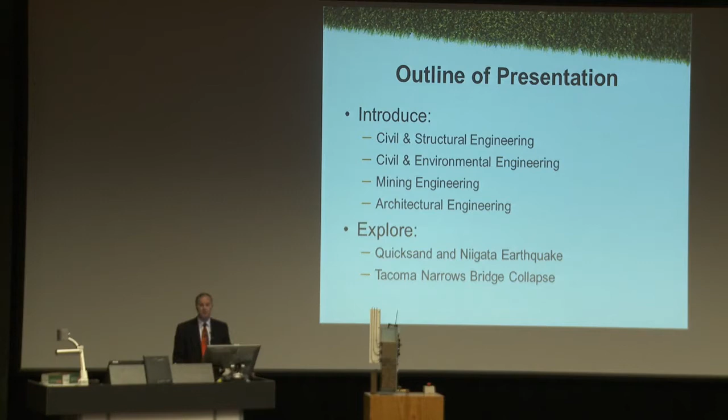And we're also going to explore 2 classic failures. We're going to look at quicksand and the Niigata earthquake, and we're also going to explore the Tacoma Narrows Bridge collapse and see what we can learn from those 2 classic failures. So let me start by talking about our programs that we offer in our school.

So as I've just mentioned, we offer the Bachelor of Engineering Architectural, Bachelor of Engineering Civil and Environmental, Civil and Structural and Mining. And those 4 degree programs are, like all standard engineering programs in Australia, a 4-year degree. There are also a mixture of double and combined degrees.

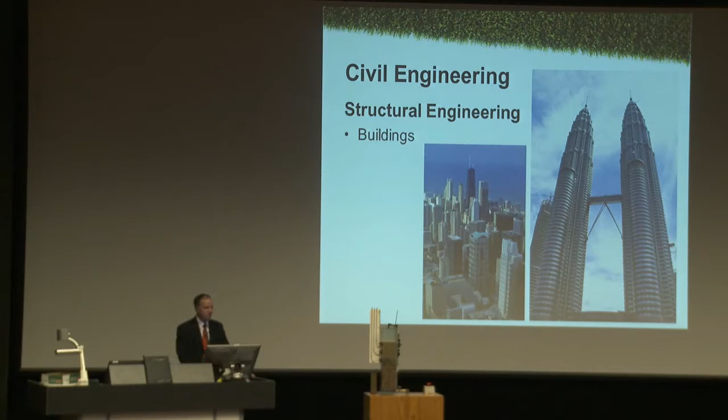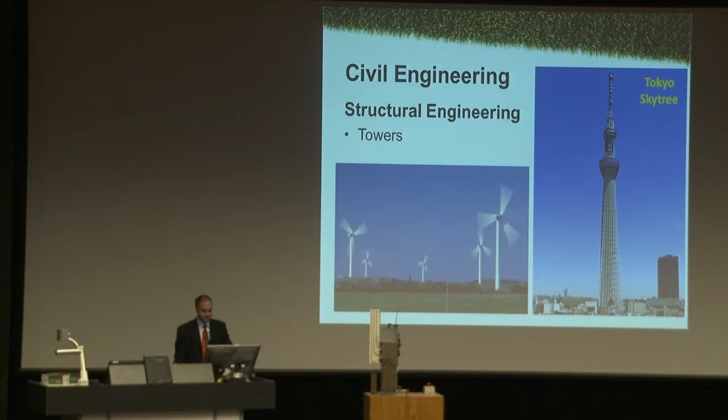So it's made up of 5 disciplines. The first of those is structural engineering, which most people would be aware of. And structural engineers get involved in the design and construction of buildings and of bridges, towers, dams, and the like. Beg your pardon. I've jumped to water engineering, which also crosses over between structures and water.

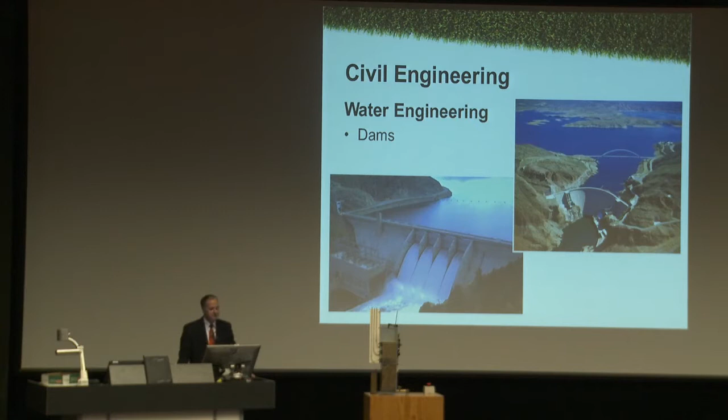So the second discipline is water engineering. So water engineering is also about dams. It's about water and wastewater treatment. So the water that we drink every day and take for granted comes often from the River Murray, and it goes through a filtration system at a number of locations around the Adelaide metropolitan area and gets purified,

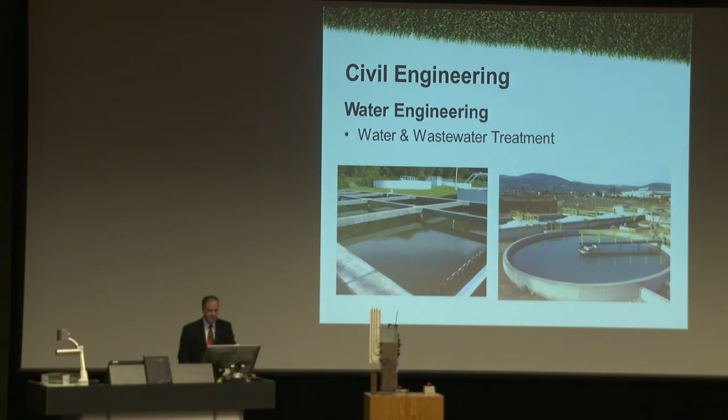and chlorine gets added and fluoride. And civil engineers are involved in those aspects, as well as wastewater, the stuff that we put down the sink and the drain and the shower and the toilet ends up at a wastewater facility, and the facilities associated with those, the equipment and the processes are also things that civil engineers get involved in.

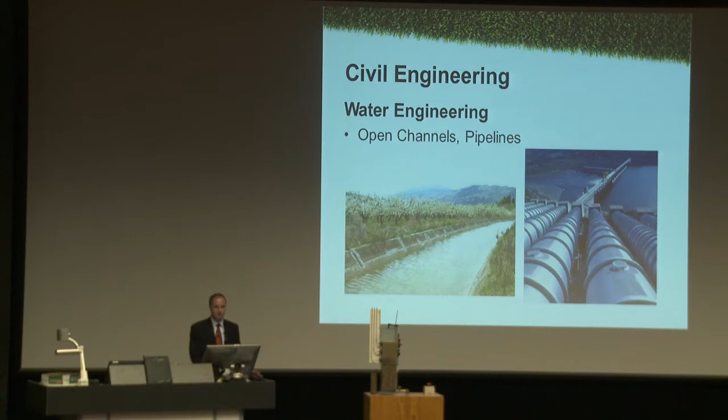We get involved also in open channel, such as you can see on the left-hand side of this screen, as well as pipelines and pumps and all of the infrastructure that is involved in those different aspects. I'm a geotechnical engineer, so I deal with the ground, soils and rocks, and we understand how soils and rocks behave when load is imposed upon them.

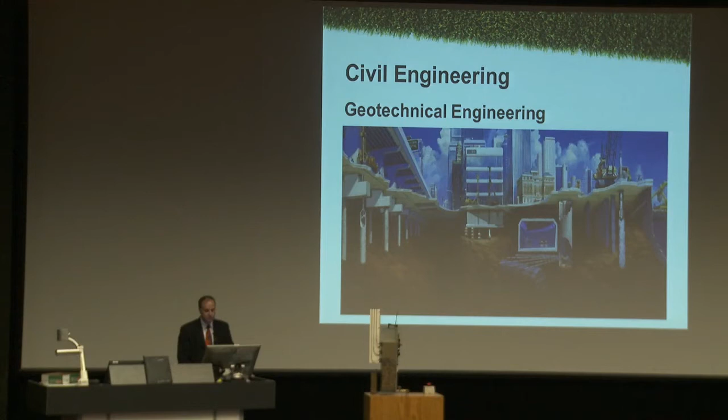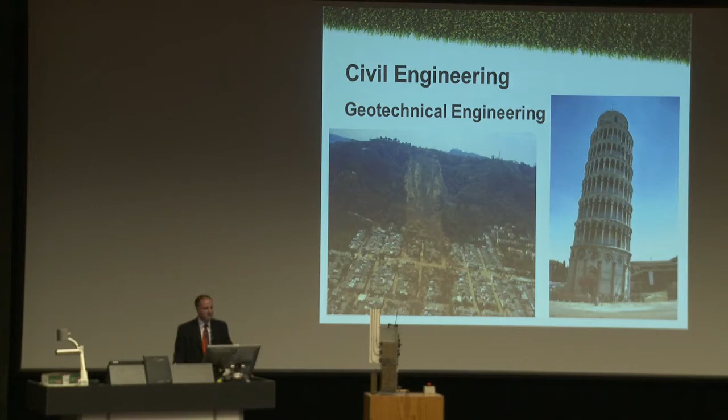We want to make sure that things don't settle too much, or that the ground is strong enough to withstand the load that we impose upon the ground. So the sorts of things that a geotechnical engineer gets involved in are pretty well summarised on this slide. So foundations, tunnels, retaining walls and things like that. It's also about landslides, and it's about settlement, and a classic example of differential settlement, that is the settlement from one part of the structure to the other, is associated with the Leaning Tower of Pisa.

And the last one is transportation engineering. It's about transport networks, such as the Northeastern Busway. It's about roadways and highways, and it's also at the micro level. It's about intersections and traffic flow. So all of those 5 different disciplines are what influences civil engineers.

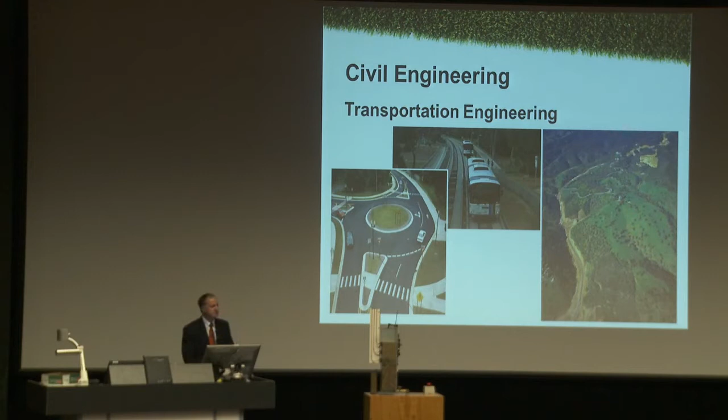Just before I go into the differences between the different programs, I'll just focus my attention on some of the other aspects of some of our other degrees. So architectural engineering, for example, focuses on building design, and it involves studies from architecture. It incorporates structural engineering, geotechnical engineering, building services, sustainable design, and water environmental, but to a very small extent compared to the civil and structural degrees.

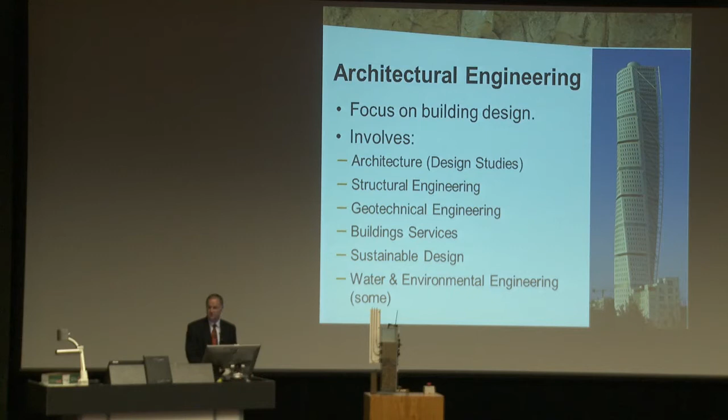So when we combine these together into a matrix, we'll look at these three degree programs which have some overlap. So you can see that in the first column here, civil and structural students would get involved in structural engineering, water engineering, geotechnical, but to a lesser extent in environmental engineering and transportation engineering.

Civil and environmentals, for example, would focus their attention more on water and environmental engineering and to a lesser extent to structural engineering. Architectural engineers, on the other hand, focus their attention on structural engineering, geotechnical, and to a lesser extent, water and environmental.

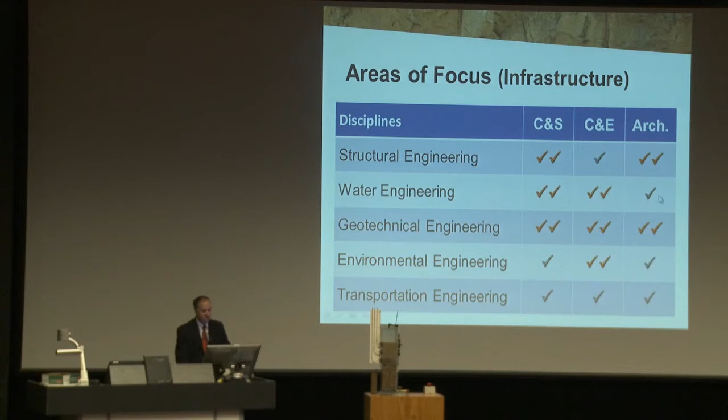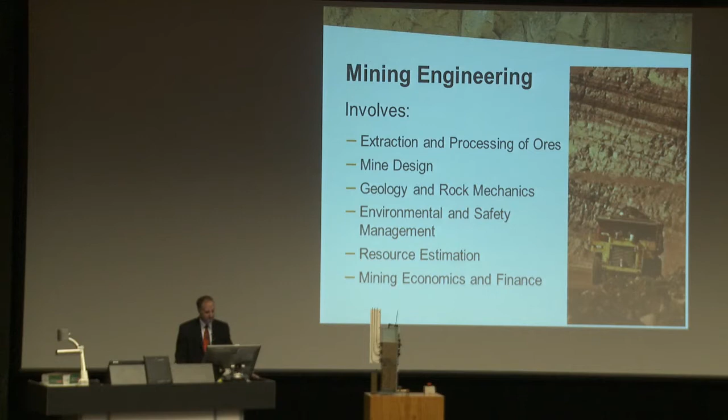Mining engineering, as I'm sure you're aware, involves extraction and processing of ore. It's about the design of mines. It's understanding the geology of the earth and about the strength and characteristics of rock. It's about ensuring that these operations are performed in an environmentally sensitive and safe manner. It's about estimating the resources that are in the ground and therefore involves mining economics and finance.

We get together every 6 months to compare notes, to compare the quality of our courses, and to ensure that our teaching is at the highest standard. It's actually not only a national, but it's also an international leader in mining engineering education.

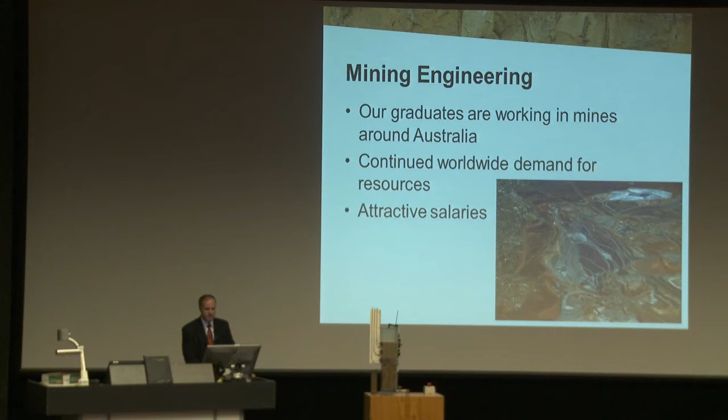Our graduates are working in mines all over the country, and you might think that resources is going through a downturn at the moment, and that has been as a result of the high Australian dollar and reduced demand worldwide. But the demand for resources will continue to increase into the future as more and more of the things that we need and build require resources from the earth. And our mining engineering students attract the highest salaries in our school.

So that's the background of the various engineering degree programs that we offer in my school. If you have more specific questions, I encourage you to talk to me or to my colleagues after this presentation.

So for the rest of today, I'm going to talk about how we learn from failure. It's an innately human characteristic. To walk, as children or babies, we would stand up and we would fall down, and we'd learn from that experience. We'd learn that falling down is painful, and we'd eventually learn how to walk. It's an essential characteristic of engineering too, that it's unfortunate that things fail, but we learn from those failures. And it's essential that we do turn those failures into a learning opportunity.

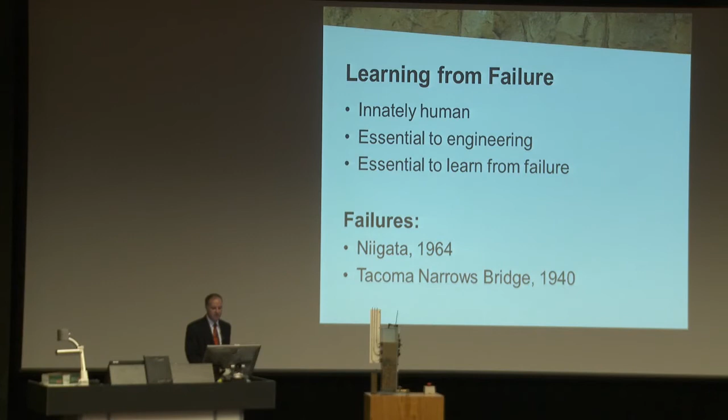As mentioned, I'm going to talk about 2 failures: the Niigata earthquake that occurred in 1964 and the Tacoma Narrows Bridge in 1940. So you might wonder what's the Niigata earthquake about. It's a classic quicksand or liquefaction failure.

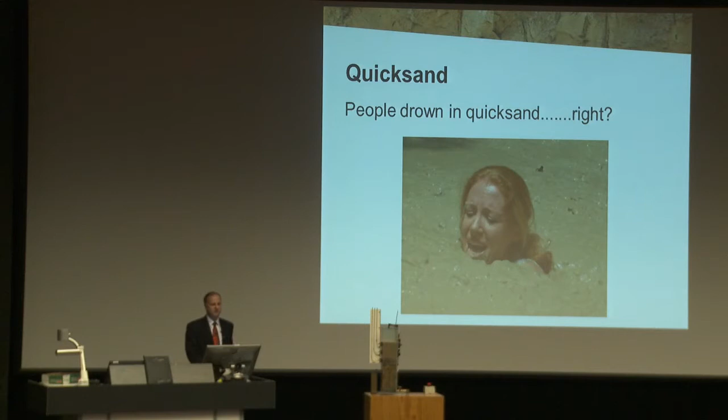If you're as old as me and you've seen some movies where people drown in quicksand, then we've become accustomed to believing that people drown in quicksand, often shown by Tarzan movies. This is an old one, so most of us weren't born when these were around.

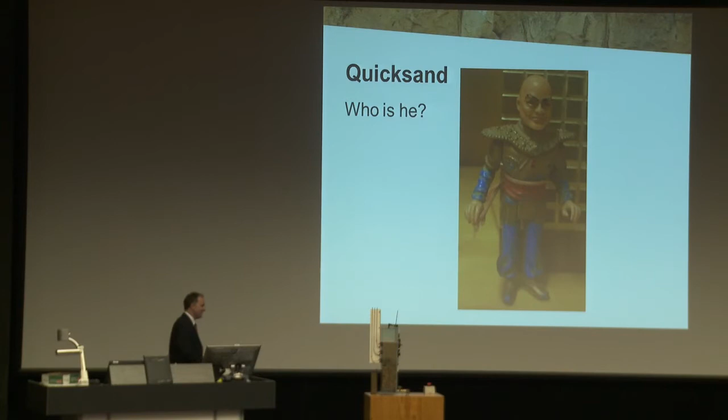Does anybody know who this gentleman is? The Hood. Good man. From? Thunderbirds, that's it. So the Hood from the Thunderbirds. The reason I mention the Hood is because I have a scale model of the Hood, and I'm going to put him into quicksand.

And I won't ask you to put your hands up, but I'll ask you to think about whether this model would sink or float in quicksand. And you might say to yourself, well, of course he's going to float because he's made of plastic.

Well, this slide shows some statistics from a couple of doctors that performed some research in 1978 on 308 men. And this shows the specific gravity of a human person. So I've weighed this individual and I've measured his volume, and his specific gravity is about 1. And that's our specific gravity essentially.

Well, not weigh, but as I said, our specific gravity is equal to 1, which means that our density is similar to the density of water. And here you can see that our specific gravity or body density is about 1. Don't worry about the x-axis because that's exploring how we might measure the density of a human being based on the skin folds. However, this model has a specific gravity of 1, and I'm going to lower him into quicksand now.

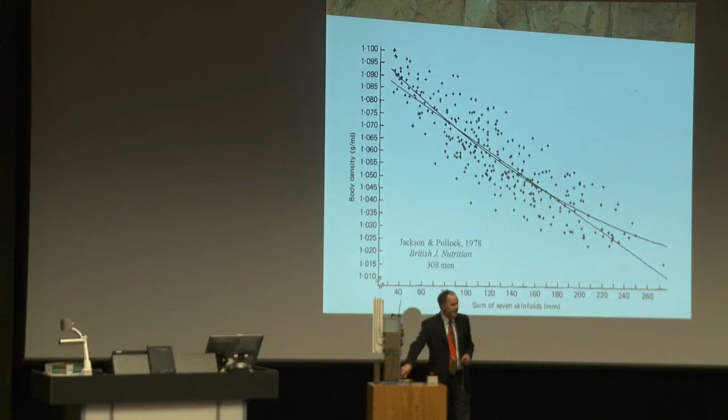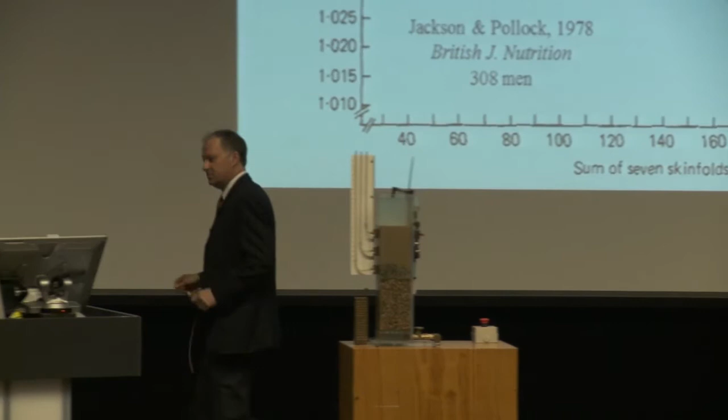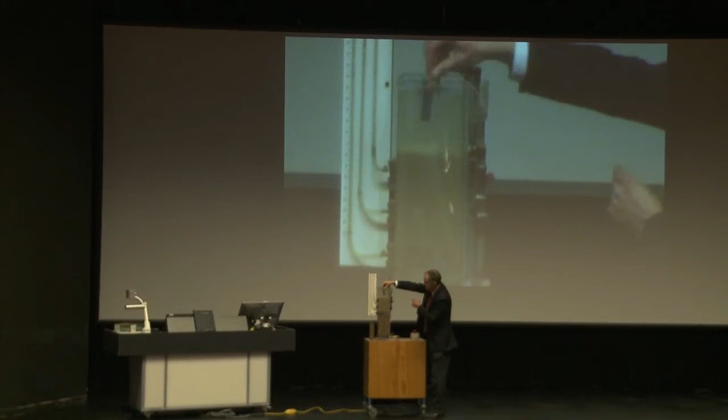So quicksand occurs in nature when we have water flowing vertically upwards through a column of sand. So what I have under here is a pump and a reservoir of water, and what I might do is just go to the camera, for those that can't see at the back. So this is what we call boiling sand, or liquefaction is its correct name. So I'm just going to lower him in and we'll see what happens. So you can see as much as I try, he's not actually sinking in quicksand.

Let me show you another example that came from the Mythbusters episode a little while ago. And the myth that they were exploring was, do people sink in quicksand?

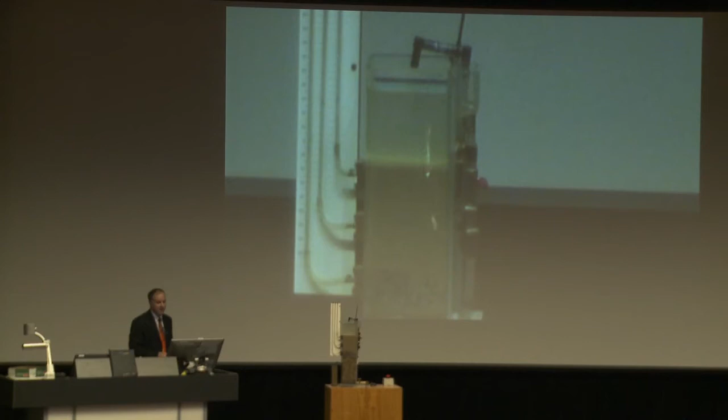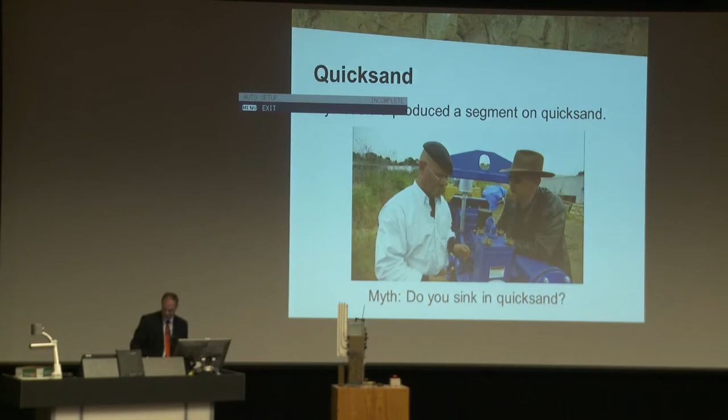Oh, I'm not sure what's happened to the sound in that one. Apologies for that. Camera off. Good. Oh, you can't see. Thank you. That's why it's not working. Thank you. I'll rewind it. Sorry about that. That's better.

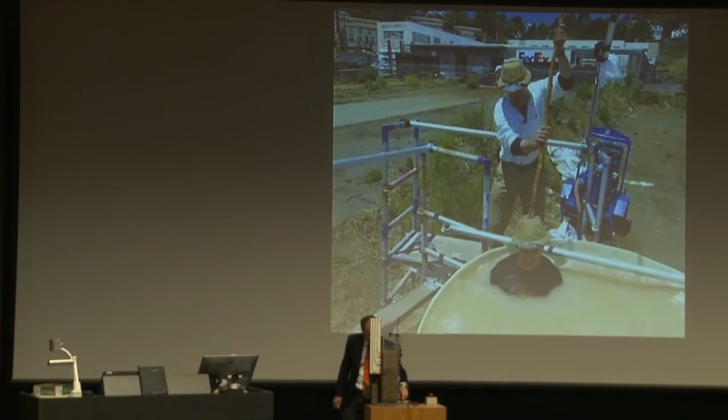It might occur at the beach when we've got water flowing from a hillside towards the sea. The sea is salty and therefore more dense, and fresh water is less dense and so can sit on top of the salty water, and we can get water percolating from the ground as a result of that.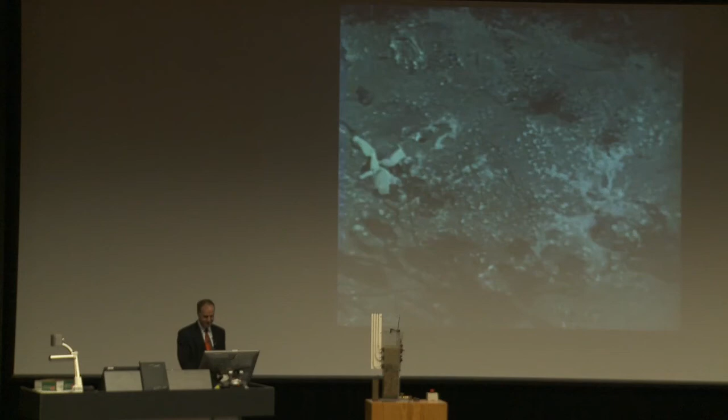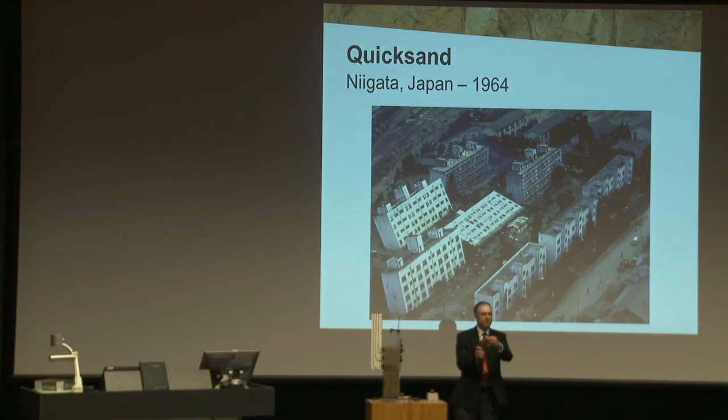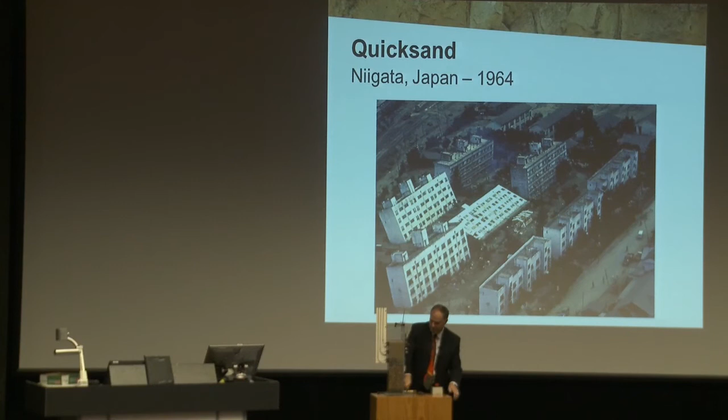So what I'm going to show you is a situation that occurred in Niigata in 1964. This is a model of a building complete with a flag on top that the guys made for me. It actually weighs 5 kilograms. It's solid bronze. It's quite heavy, and it's not going to sit down because there's still some. Let me just see. Need to drain the water down a little bit more. So I just need to put that down. So what I'm trying to do here is, you can't see again.

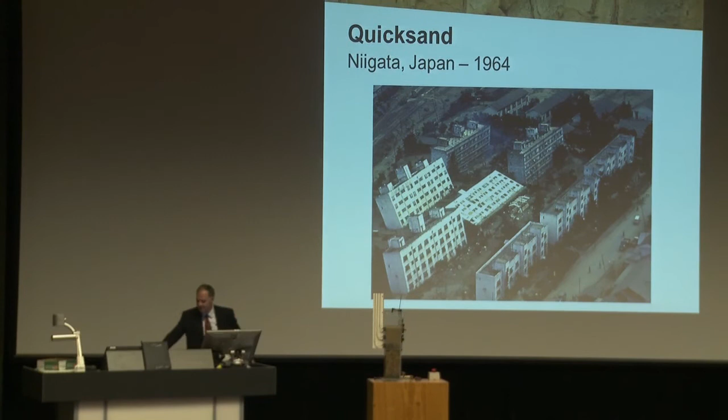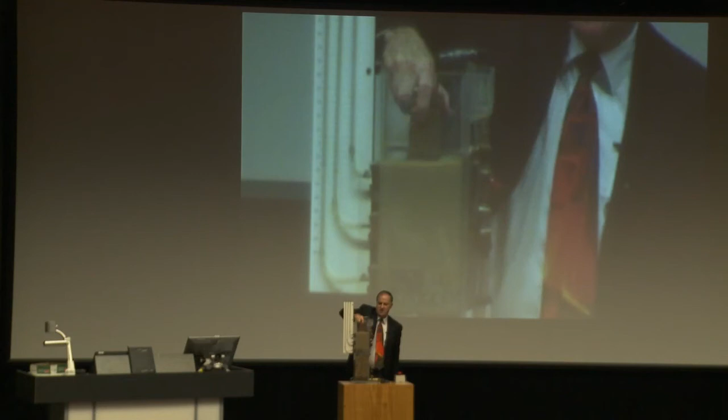What I'm trying to do here is simulate the same kinds of ground conditions that occurred in Niigata in 1964, where the water table was close to the ground surface. So when I place the building on the ground, you can see that it sits there happily, but along comes an earthquake, and watch what happens. So I wonder what happened there. What happened with the earth, with the building, why it fell down.

Normally in a class I would ask for questions, a bit more difficult here. What happens? An earthquake is a wave that propagates through the ground. Because the sand is essentially beneath the water, the motion causes the particles to vibrate relative to one another, and so the particles separate for an instant in time. So for a moment, this building felt like it was on water, and hence that's why it failed.

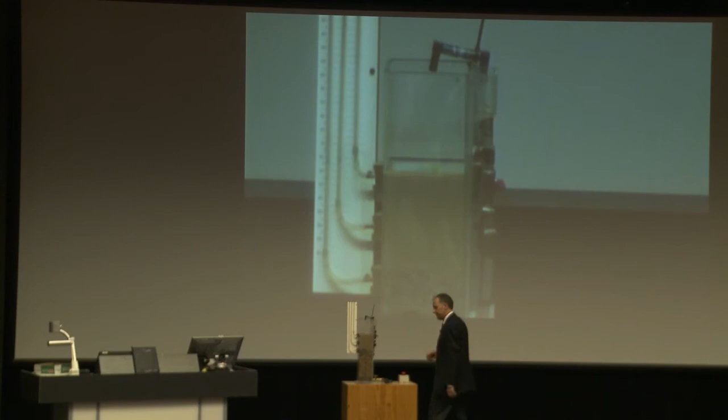I just remembered that I've forgotten to tell you why people float in quicksand rather than sink. And that is because the combined density of the sand and the water is actually more dense than water by itself. So it makes sense that we actually float in quicksand. The other thing to bear in mind is that the buoyancy is greater because I had a flow of water upwards through the ground, and that adds to the person's ability to float.

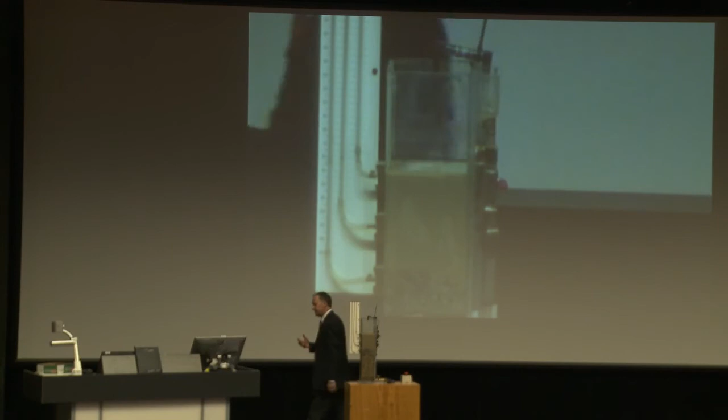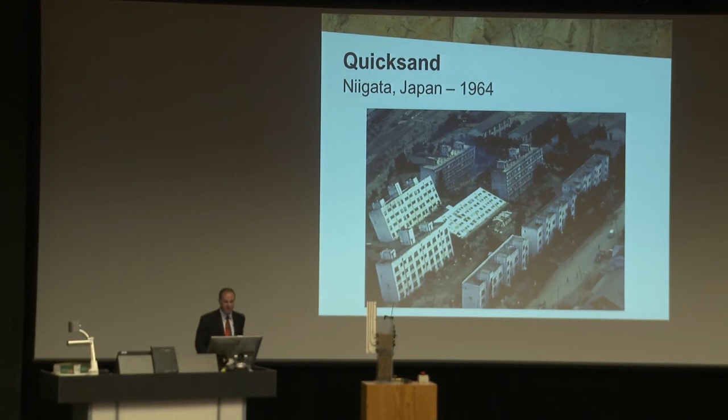Okay, so the question is, if we were... just let me go back a little, and I need to go to that. So this is what occurred in 1964. You can see a whole bunch of apartment buildings that have fallen down in a very similar manner that I've just shown you just now. It's not terribly often that we get to see the underside of a building.

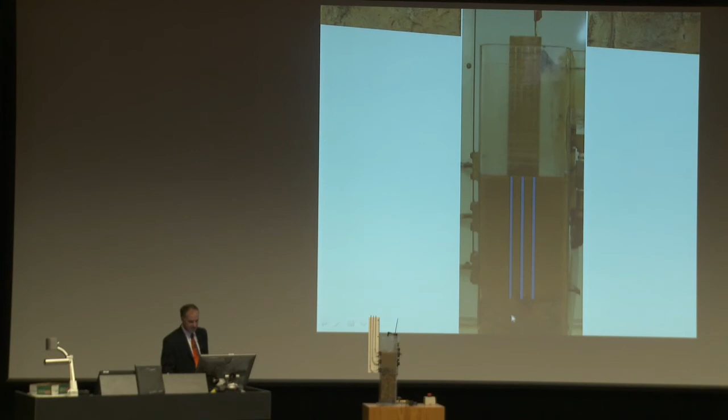So the question we ask our students is, if we were confronted with a site like this, what would we do? Would we walk away from it? How could we design a structure to withstand these kinds of situations? So what we could do is we could put some piles into the ground. So you can see here that the piles would go through the liquefiable material, the sand, and then sit on a firmer stratum, which in this case would be gravel.

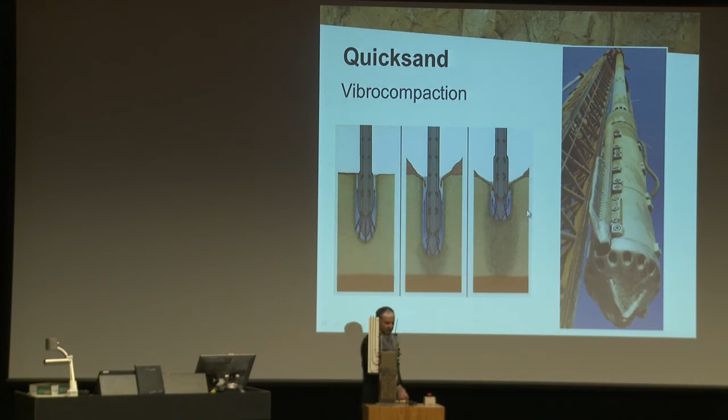Another option that you may not be aware of is a thing called vibrocompaction, which is where the density of the ground is increased, and that's by basically placing a giant vibrating mechanism into the ground. So what I'm going to do is simulate that. So essentially it works by doing this kind of thing, by allowing the ground to settle more, and its density and therefore its strength increases. So you can see that the ground settled more, little bit more.

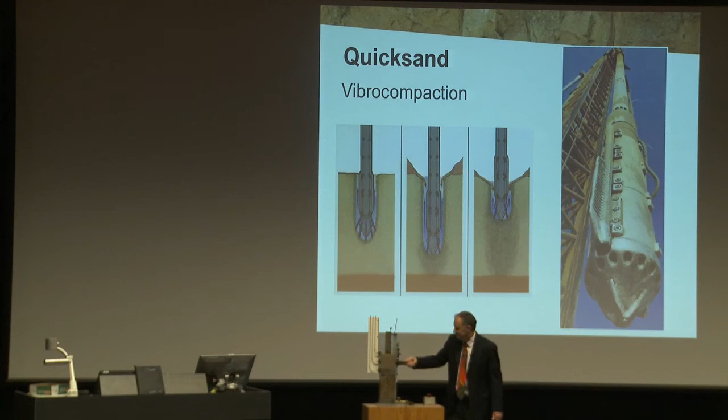So I'll keep doing that a bit. Just wait for it to settle down a little bit. Now you can see it's a lot stronger. Can actually get it to fail eventually, but you can see it needs a fast, greater magnitude earthquake for it to fail.

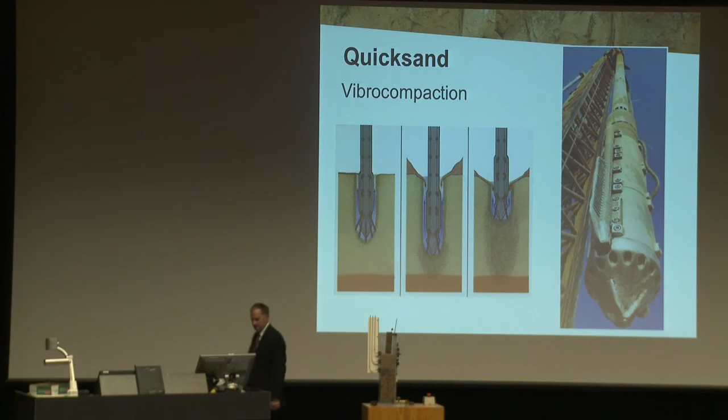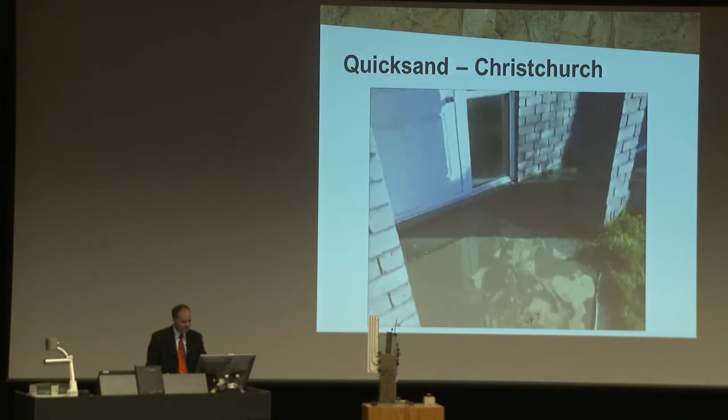And this is a photo or a video taken by one of our PhD students after the Christchurch earthquake that occurred in 2011. And you can see the water bubbling up through the ground several hours after the earthquake. Many houses had to be abandoned in Christchurch as a result of this.

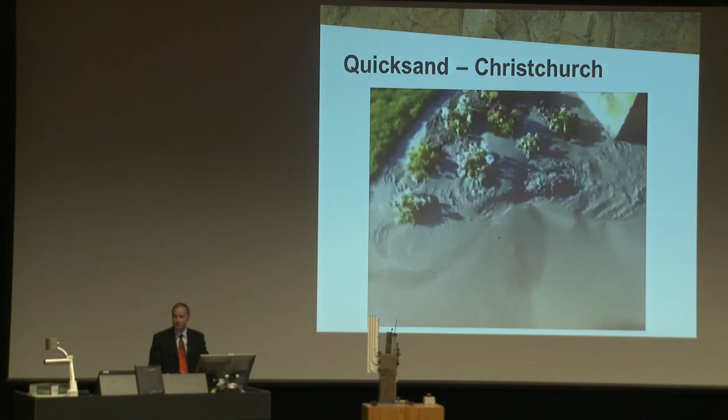Okay, now I want to move on to another collapse, which is the Tacoma Narrows Bridge collapse.

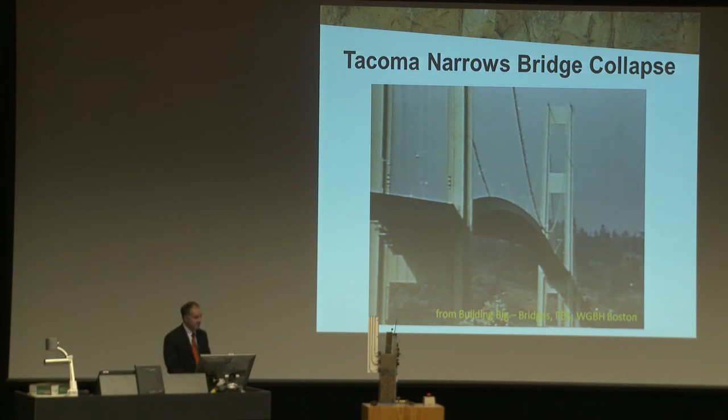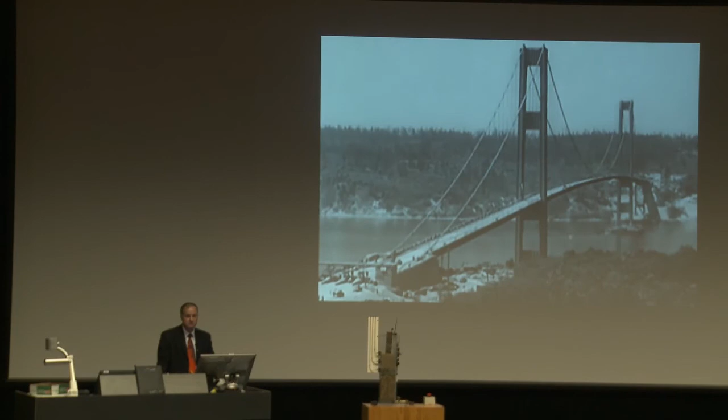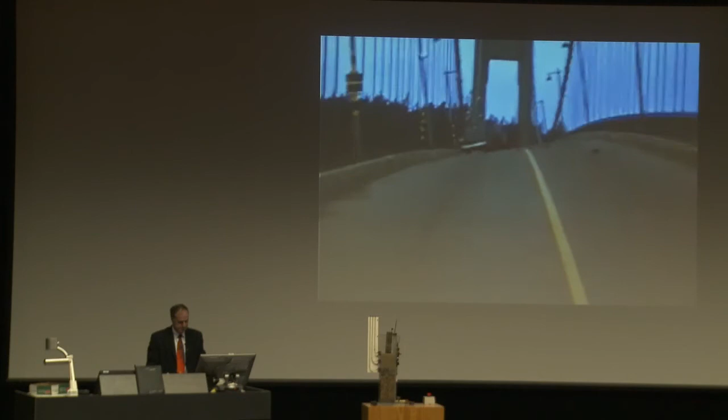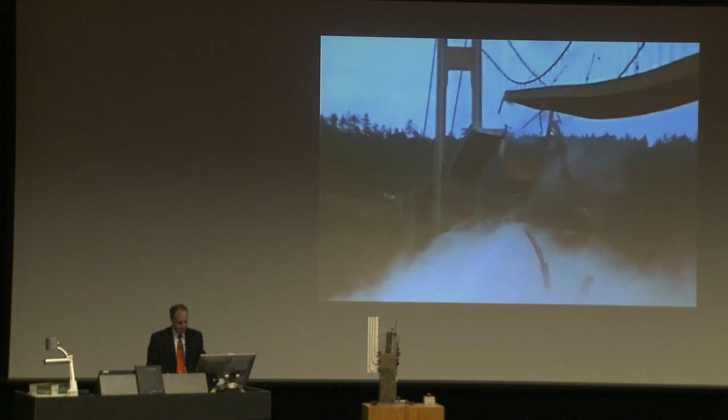In 1940, barely 3 years after the Golden Gate opened, the Tacoma Narrows Bridge was completed in Washington State. Designed by Golden Gate consulting engineer Leon Moisseiff, it was the culmination of his career-long effort to make suspension bridges slim, elegant, and economical. But this bridge moved up and down like no other before it. Then, just 4 months after it opened, in a steady 40-mile-an-hour wind, the Tacoma Narrows Bridge began to twist as well as move up and down. In 4 hours, the bridge tore itself apart. Years after the collapse, investigators using test models and wind tunnels finally figured out what caused the disaster.

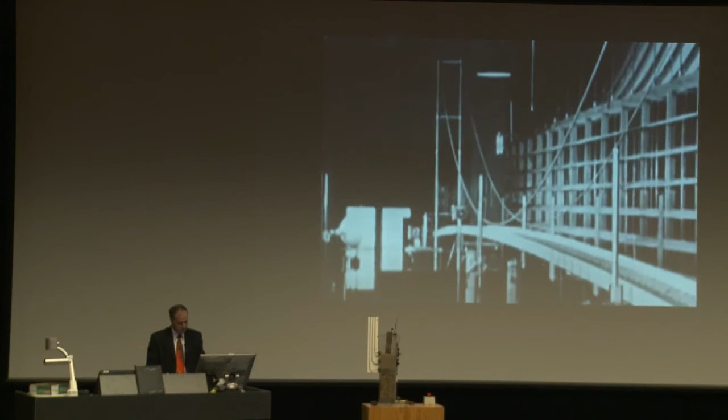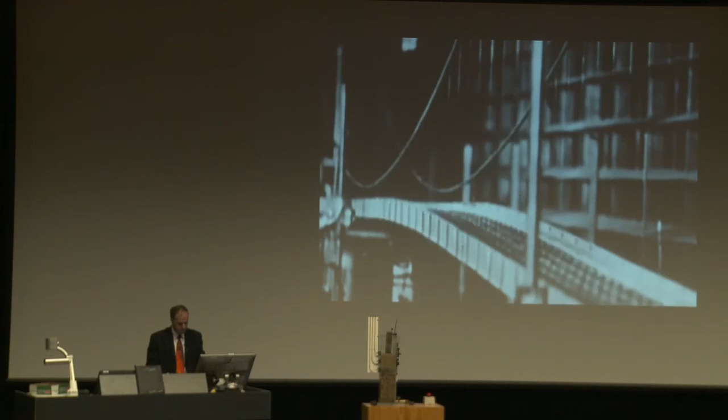Well, the Tacoma Narrows was a different type of bridge than had been built before. Instead of having a truss hanging underneath the cable, it had a girder, which is a solid wall-like structure that obstructed the wind. And if a little piece of wind makes the bridge twist ever so slightly, it has a profound effect upon the wind that's coming around it. It forces the wind to behave like a major climate change right on the bridge. The moving bridge began to fan the steady wind into a swirling motion, which created many high and low pressure systems called vortices. These in turn forced the bridge to increase the motion it already started.

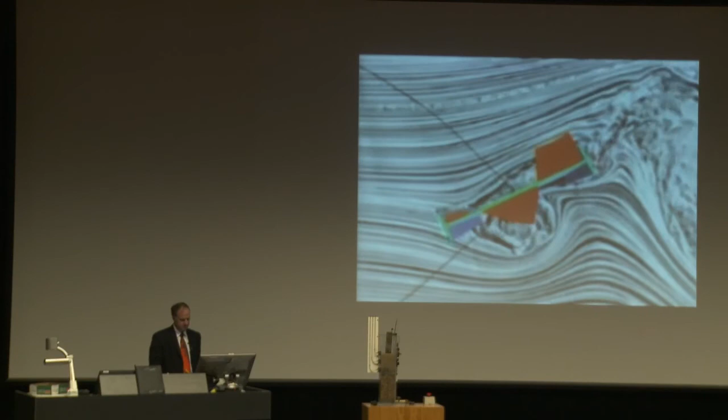But it's like somebody on a swing. A little push now, a little push later, at exactly the right time, builds up into tremendous amounts. It's called properly a self-excited vibration. The bridge took the wind over and made it cause the bridge to fail. Even with its design flaws, a heavier bridge might have resisted the wind pressure. But Tacoma was built light to save money and suffered the consequences.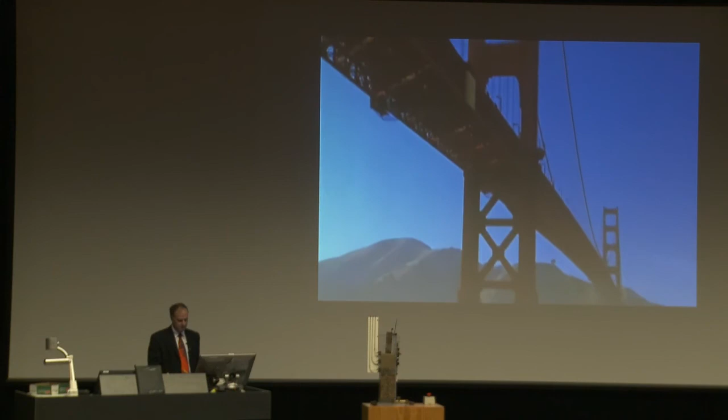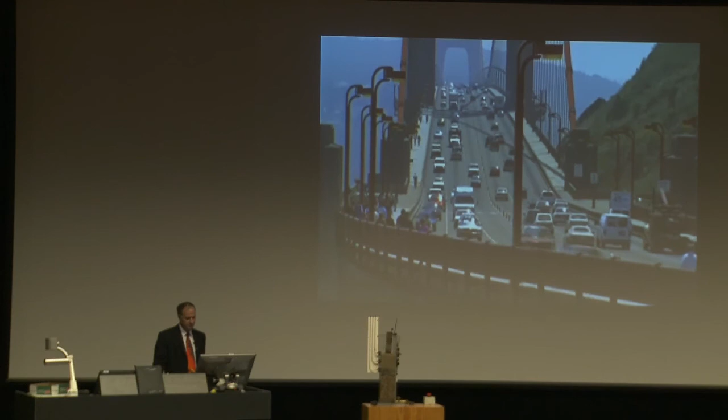Other Moisseiff-influenced bridges, even those with stiffening trusses like the Golden Gate, were immediately reinforced with bracing systems that restrain twisting motions in the wind. So far, these measures have prevented another Tacoma, but the problem of excessive movement has not been entirely eliminated, as this 1982 footage of the Golden Gate clearly demonstrates.

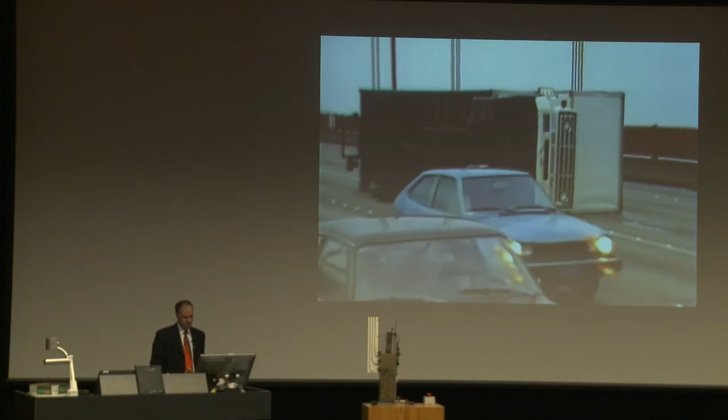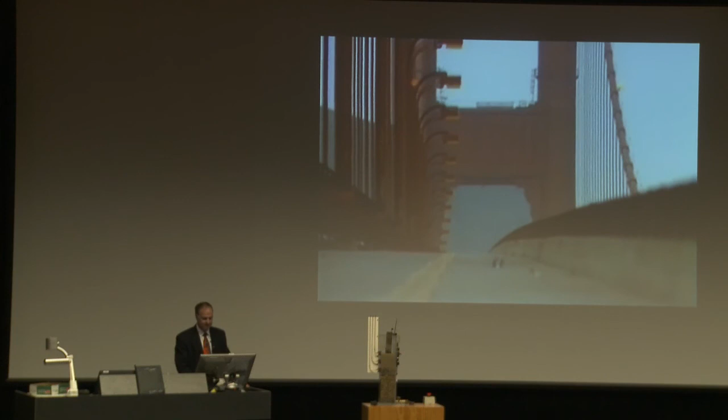In high, steady winds, the bridge can move radically up and down, placing tall trucks in danger of blowing over. The bridge is now closed for high winds. But in engineering, most things are trade-offs. So that was the Tacoma Narrows Bridge.

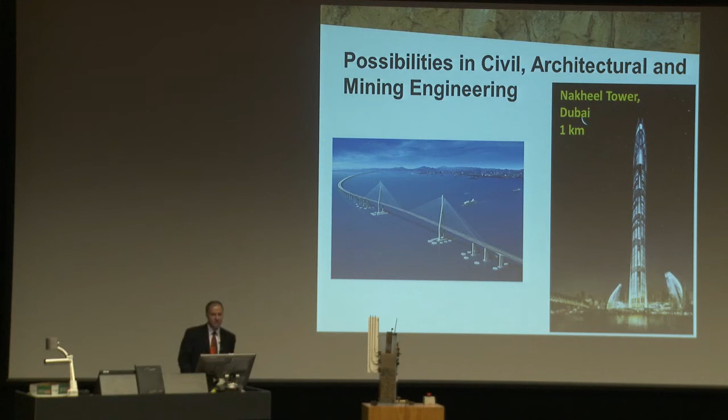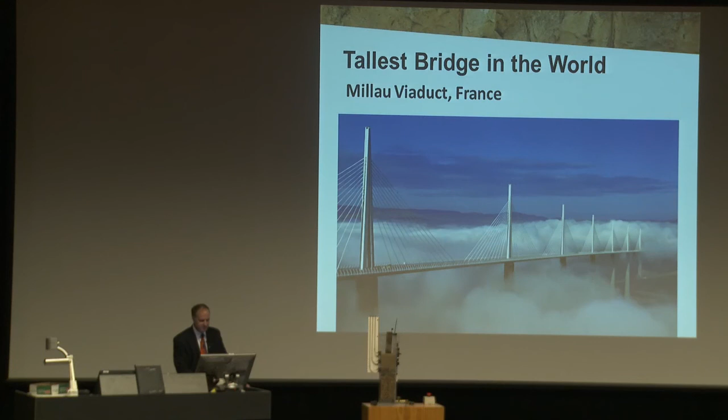Just like to, as I wrap up, focus on a few possibilities for civil, architectural and mining engineering. So if you choose a career in one of those disciplines, you might be involved in perhaps designing and constructing the tallest bridge in the world, such as the Millau Viaduct in France, or the Akashi Kaikyo Bridge in Japan, which is the longest suspension bridge in the world.

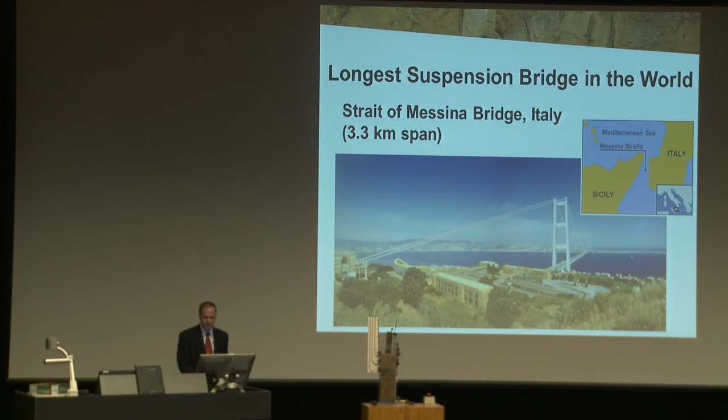Currently there's plans underway to design and build what will be, if it ever gets off the ground, the longest suspension bridge in the world, which will span from Sicily to mainland Italy across the Strait of Messina. You may be involved in the design and construction of the tallest buildings in the world, such as the Burj Khalifa in Dubai or the Taipei 101, or the largest dam in the world, Three Gorges Dam in China.

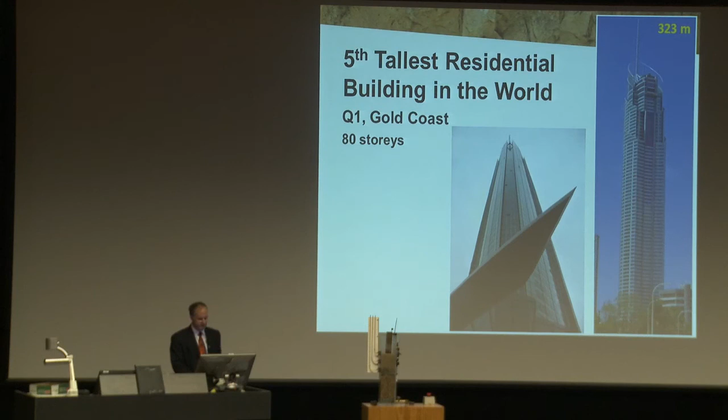You might think, what's that got to do with Australia? Well, up until recently, we had the tallest residential building in the world, Q1, on the Gold Coast, which is an 80-storey high building, 323 metres high. Checked on Wikipedia the other day, and it's down to 5th now. However, I'm aware of some geotechnical engineers from Australia that actually designed the foundations for the tallest building in the world, the Burj Khalifa in Dubai.

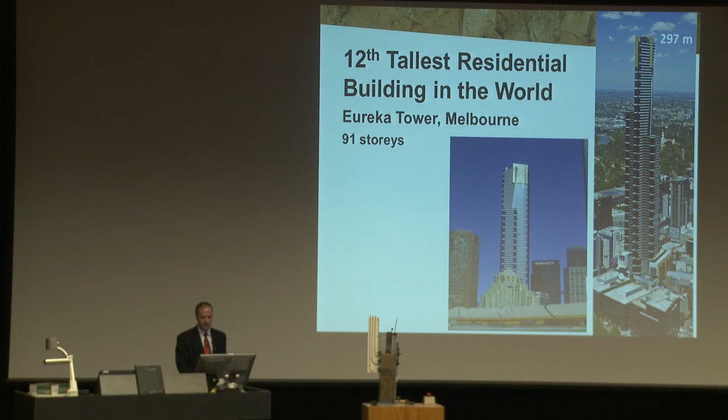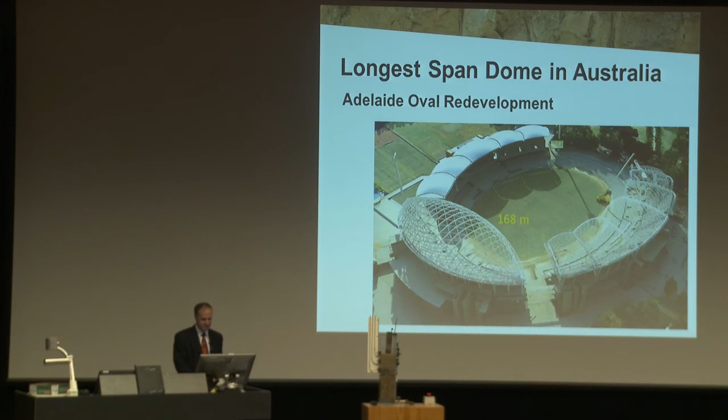Or the 12th tallest now residential building, which is the Eureka Tower in Melbourne, which is 91 stories high. Closer to home, I went to a talk the other day where we were informed that the roof for the new Adelaide Oval is going to be the longest span dome in Australia at 168 metres. When the Olympic Dam project goes ahead, it'll be the largest open-cut mine in the world.

So why choose to study at the University of Adelaide? It's the third oldest university in Australia. It's internationally recognised for excellence. As from next year, every first-year, second-year, third-year and fourth-year student will have a small group discovery experience with senior academics. There'll be increased study abroad opportunities and scholarships for disabled students.

Why choose to study in my school? Well, we are among the top civil and mining engineering schools in Australia. We have award-winning teachers, and our research is regarded internationally. Our qualifications are regarded internationally. We have students working all over the world, and our students are in high demand locally, nationally and internationally.

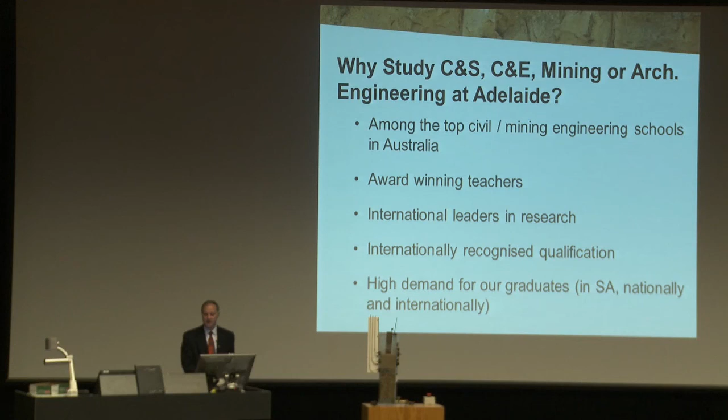Why choose a career in engineering? There's 10 reasons there on the screen. Love your work and live your life too. Be creative. Work with great people. Solve problems. Design things that matter. Never be bored. Make a big salary. Enjoy job flexibility. Travel. Make a difference. Change the world.

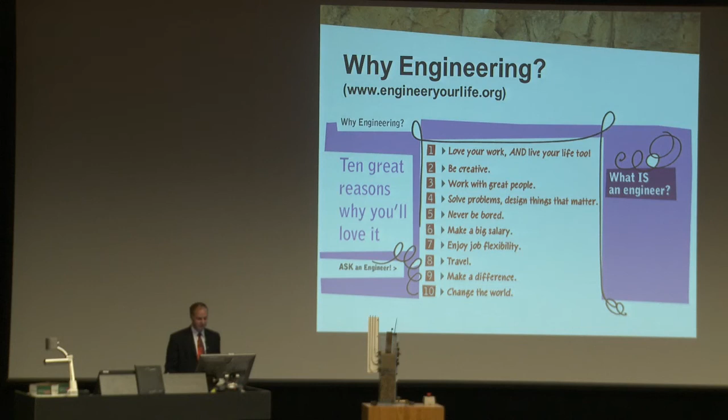So the careers that my school offers are those listed on the left-hand side. Where might you work? You might work in private practice or in government, as a consultant, in the construction industry, in mining. But because our degree is problem solving and gives unique skills, people skills as well, and engineers are numerate, they understand numbers, they understand how to solve problems, our graduates are increasingly working in the finance, banking, insurance and legal industries.

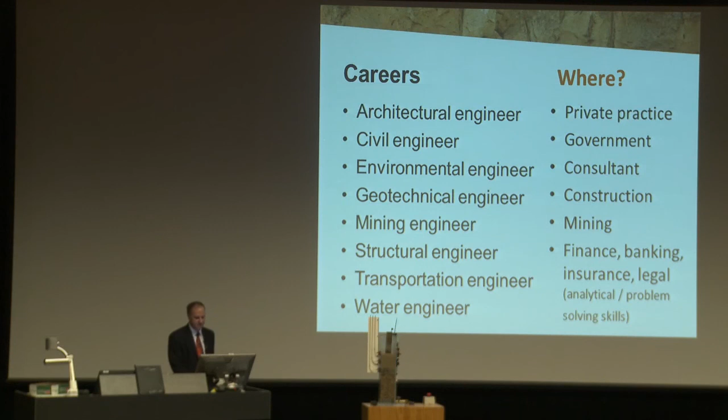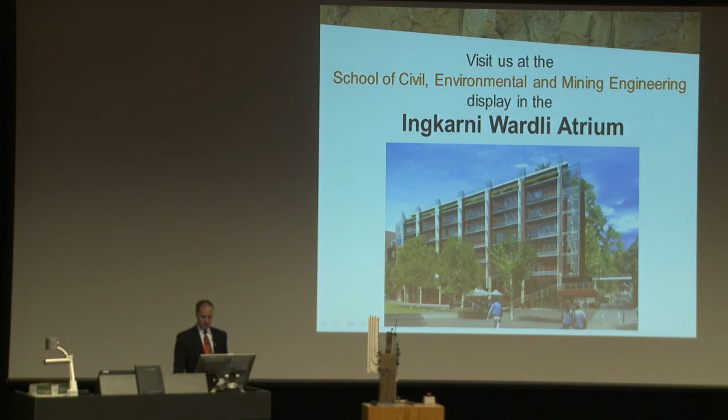If you're interested and you have more questions, as I said before, there'll be opportunities to ask those questions of us in the Ingkarni Wardli building in the atrium, which is just around the corner from here. More information is also available on our website. There are some exhibition display areas. Also, our student centre is available for answering questions, and there'll be an open night on Wednesday the 11th of December where you can get a feeling for what it's like to be a part of the community at the University of Adelaide.